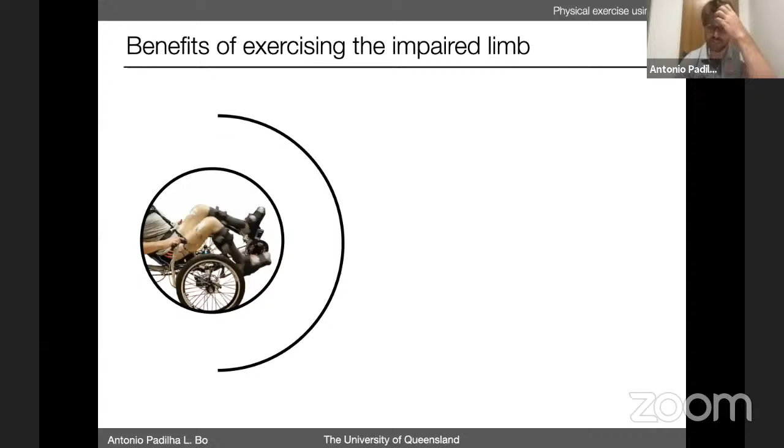So I was actually showing this video. So sorry that you're not able to see that. So that's a person with complete paraplegia cycling. And then I was talking about how actually to control that. I went through some of these benefits of the activity and then how we control that. So this is a diagram that I'll try to explain briefly. This is part of our control.

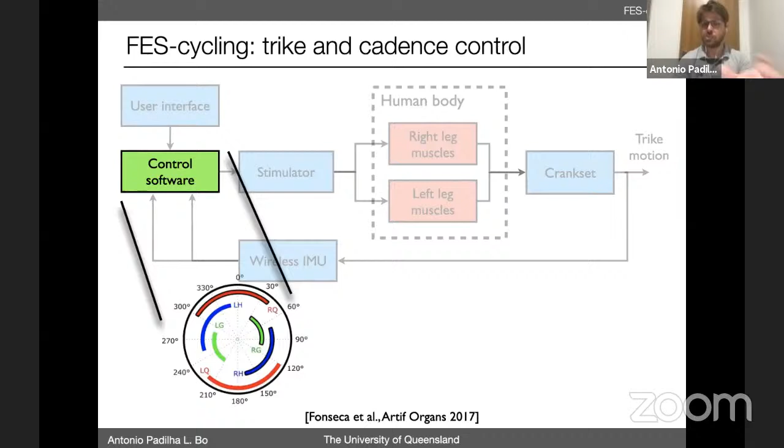And this is another level of control we can implement. So you can imagine that you have then a system that not only is a wearable active system, like a wearable exoskeleton, a wearable robotics device, but it's something that's inherently connected to your muscles and the way you move. And so this is actually controlled by the user, but then you can have different layers of control.

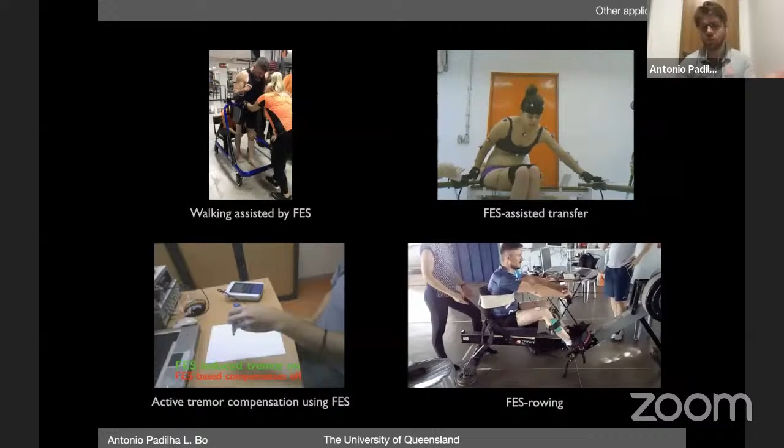So in this slide, actually, I'm showing how you could have an additional layer of control that controls the cadence or the speed of cycling. So in this case, we can have that type of performance. That was just a single example of what we can do with these technologies.

So in these videos here, sorry for that, I don't know what's happened with my slides. So in these videos here, we show other applications that can either be used to enable physical exercise by people with motor disabilities, or to be used in an assistive scenario as well. So for instance, in this video on the top right, you see again a subject with complete paraplegia that's using the same technology to actually transfer from one seat to the other, from the wheelchair to the bed, and these kinds of activities.

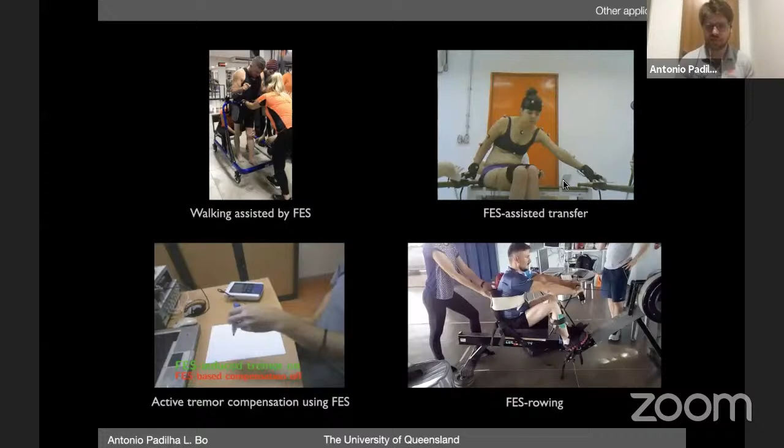Well, that's of course the core of my work. But in today's presentation, I'd like to target one specific aspect, which is: why are these systems not available to users today? Because we've been showing, not only ourselves but many other research groups, how beneficial they can be in terms of the health benefits. And so what's the problem?

And of course, I have to acknowledge that there are many issues for that. And some issues are not related to either research or technological development, but more to socioeconomic reasons and cultural reasons as well, and different aspects. Specifically for this technology, we have really hard market and regulation challenges. It's very sad that actually some clinicians, even in high-income countries, are not aware that these technologies actually exist, and so for different reasons, we see that some subjects don't have access to that.

But in addition to market and regulation, we do have lots of technical challenges that need to be tackled in order to improve the performance or the way these devices are used. There are different aspects that we could discuss, but today I'm going to focus on aspects related to how we integrate different sensing modalities, how we can integrate that with different actuation systems, so more like a wearable robotics perspective, and how we can improve the interface. So the person is controlling his body, so how can we improve that?

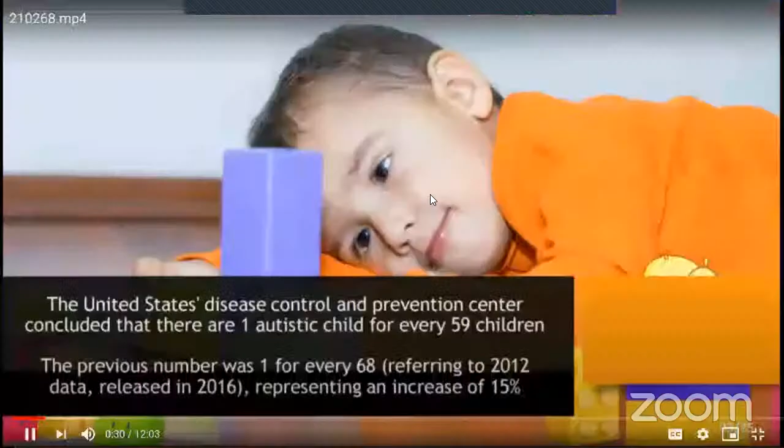Sorry, but we are not hearing now. I think the playback has stopped. Just a second. Okay. Okay.

people with an autism spectrum disorder. The Centers for Disease Control and Prevention in the United States concluded in a survey that there is one autistic child for every 59. The previous number was 1 for every 68, referring to 2012 data released in 2016, representing an increase of 15%. But what is autism?

Autism spectrum disorders, ASD, is a set of neurologic development disorders that affects

The audio is not working. Reproduce.

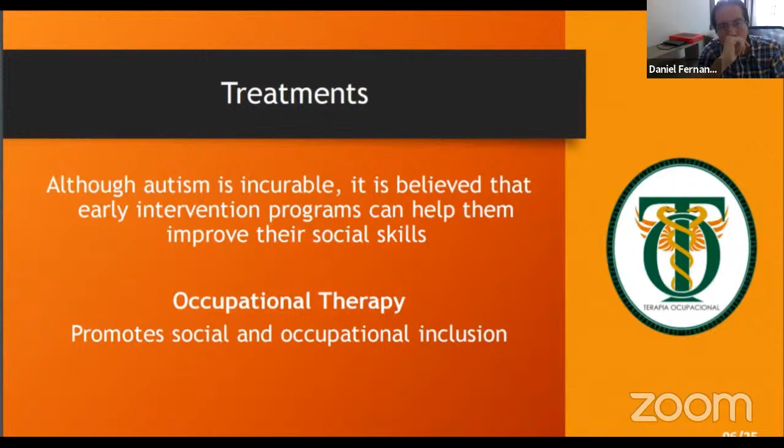Studies have shown that the interaction between children and robots has results that help children with autism and improve their quality of life. Therefore, based on our literature review, some research points have been identified and will be discussed through this presentation. We believe that this review of robotic research for children with autism provides useful information about previous work on various aspects of HRI, improving the communication with people with ASD deficiencies.

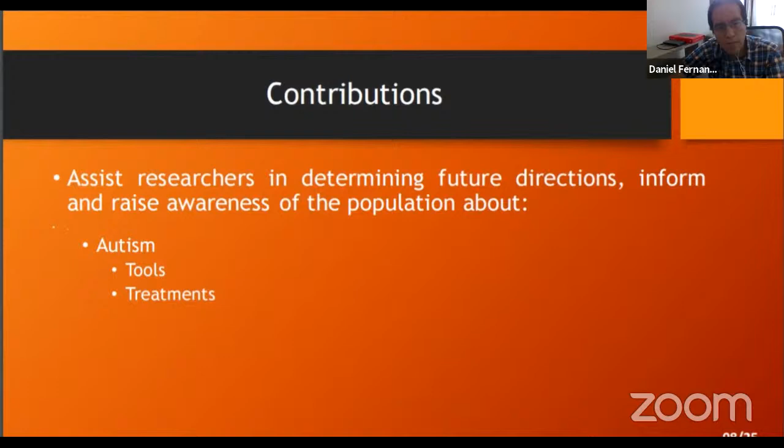Besides that, it helps future research to identify potential areas to be explored in the hope of closing existing gaps. In addition, we also hope to inform the population about existing treatments and tools. A systematic review aims to identify, analyze, and interpret all available evidence regarding a particular research question in an impartial and repeatable manner. It is possible to suggest areas that should be investigated, clarify the state of the art for positioning new research, and examine empirical results.

In this review, the main objectives were to identify works that study autism related to robotics, identify the state of the art, identify the techniques used and the existing tools, and identify and assess gaps.

For the definition of search sources, the following parameters were verified: coverage, availability, versatility, and usability. For coverage, only search sources that returned a considerable number of updated and fully accessible works were considered. For versatility, search engines were selected that support work in an automatic way. Finally, the accepted search engines were also considered using the usability criterion, that is, being easy to understand and operate.

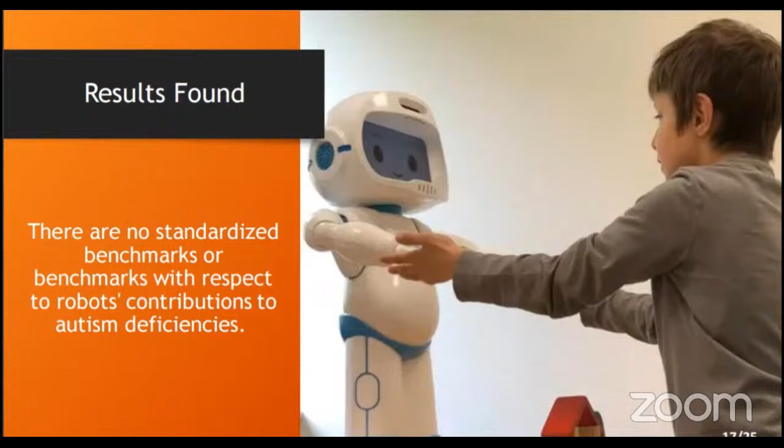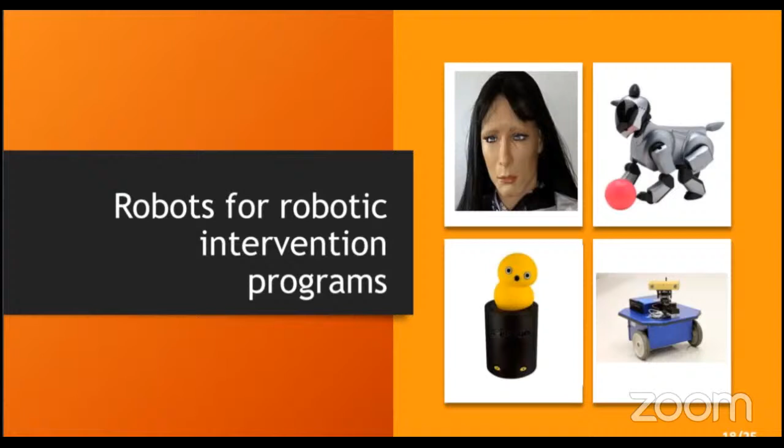In the duration of treatments, most of the research has been conducted as short-term intervention. Both short and long-term robotic intervention programs are important aspects to ensure that children obtain sufficient exposure to the robot in terms of behavior improvement.

Despite considerable efforts in the development of robotic tools for children with autism, our literature review did not find contributions to stereotyped behaviors related to autism deficiency.

Finally, conclusions: three critical research points were identified: diversity in research focus, lack of contributions to autism stereotype behavior, and the duration of experiments. Thanks.

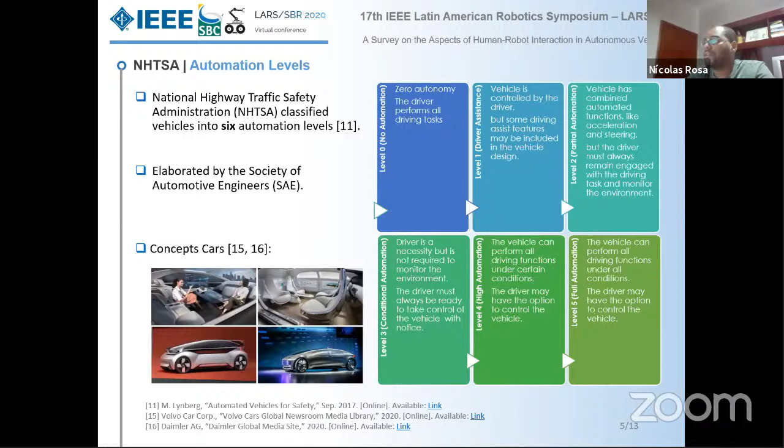In this work, we identified 4 different types of human-vehicle interactions based on 2 criteria. The first one is how the interaction is established between the agent, human and AV, and the second one is the type of technology involved in the interaction.

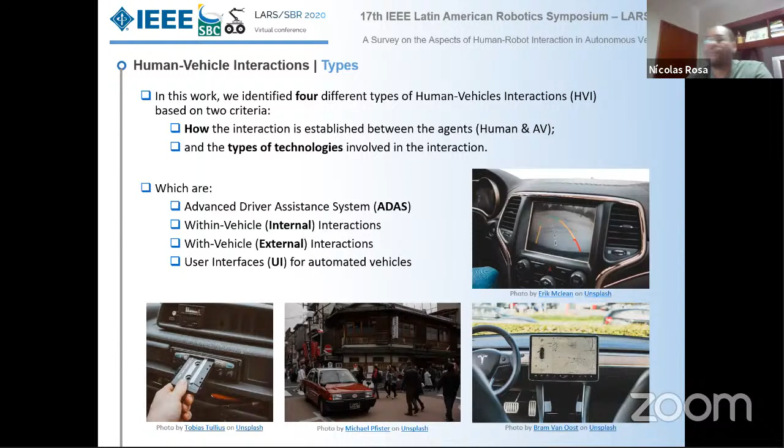They are: the first one is Advanced Driver Assistance System, ADAS. The second one, within-vehicle interaction, or internal interactions. The third, with-vehicle interactions, or external interactions. And the last one is the user interfaces, UI, for automated vehicles.

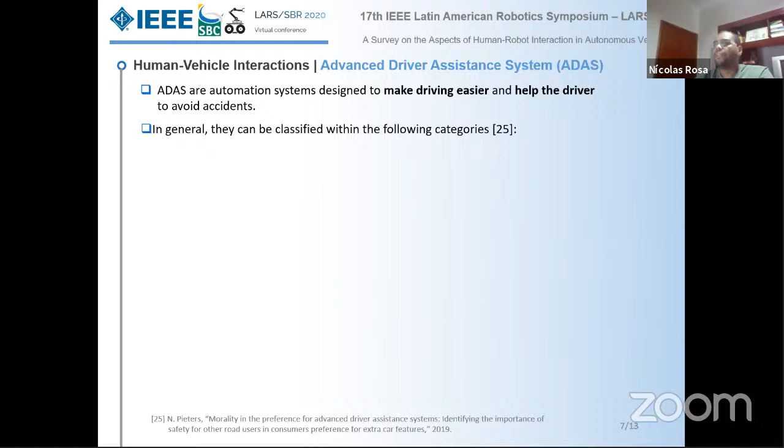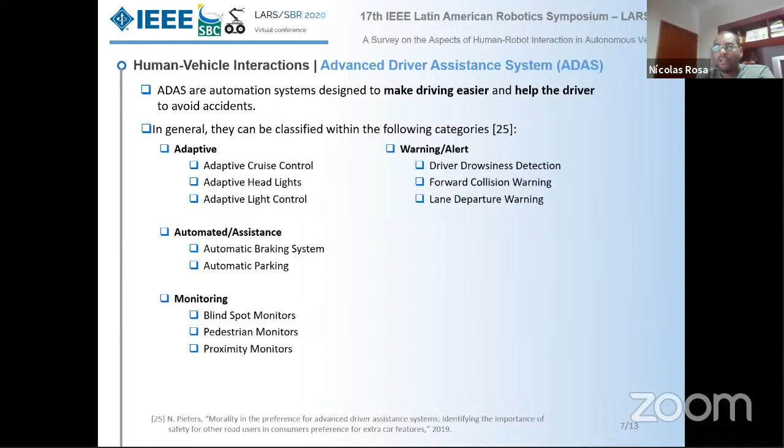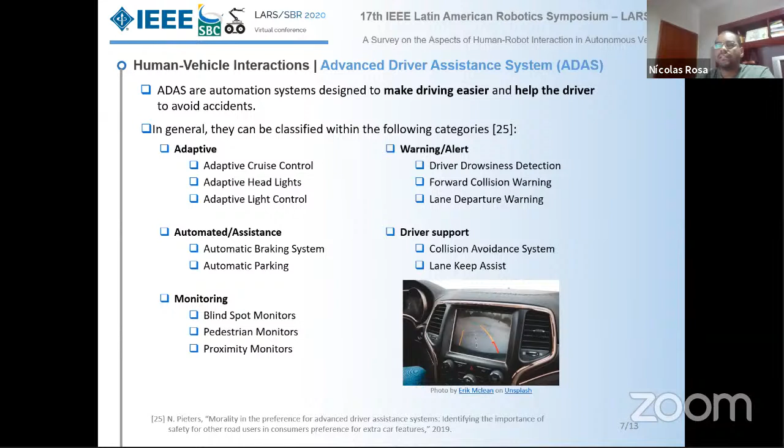ADAS are automation systems designed to help make driving easier and to help the driver avoid accidents. In general, they can be classified within the following categories: the first one is adaptive, automated, or assistance. It can be used for monitoring, warning, and driver support. The most popular ones are cruise control, ABS, and lane keep assistance, among others.

Regarding within-vehicle interactions, interactions that occur inside the vehicle, which non-driving related activities the user would like to engage in while on a ride in a highly automated vehicle. The reference research found that users like to listen to music or radio, talk to other passengers, read, work, watch out of the window, among other activities.

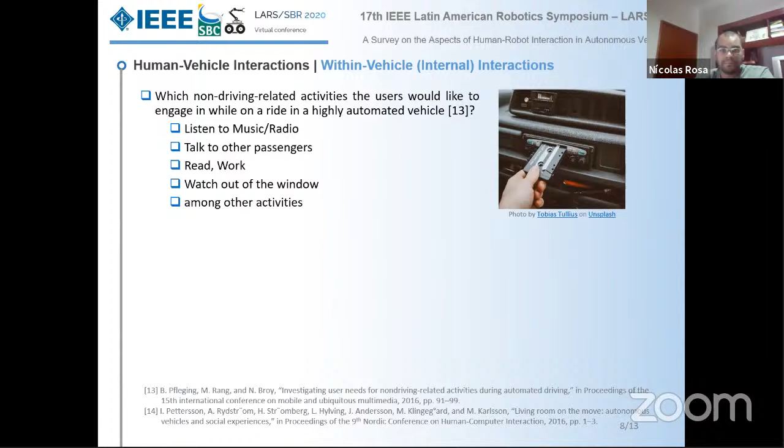This type of social experience also includes the interaction that passengers can have with other people who may or may not be present in the vehicle.

Regarding with-vehicle interactions, the inclusion of a robotic agent might culminate in a series of confusing traffic situations for other drivers and pedestrians.

Human-to-human interactions occur all the time, usually expressed as acts of kindness toward others, which makes traffic more harmonious since they indicate their movement intentions. These interactions are in general expressed by gestures, eye contact, and light signals.

However, how are these interactions handled when there is no longer a human driver? Another type of human-vehicle interaction is the user interface.

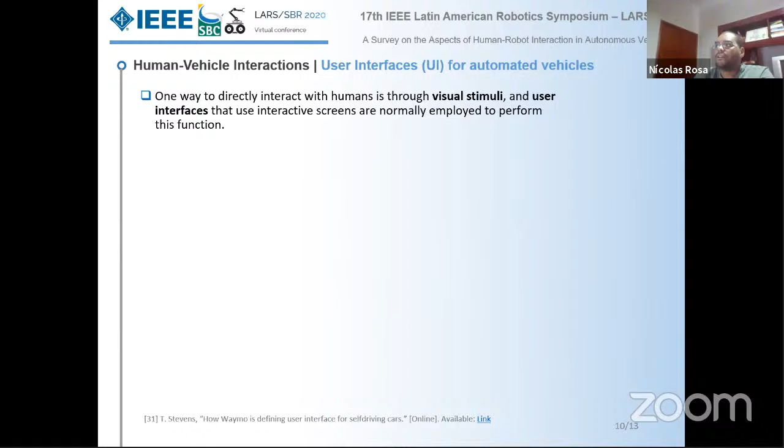One way to directly interact with humans is through visual stimuli, and user interfaces can use interactive screens normally employed to perform this function.

They can display relevant information about the trivial car status, like speed, distance traveled, and amount of fuel. Or they can display infotainment fields, allowing the driver to listen to the radio, check GPS maps, or make cell phone calls.

Research has been designed for the social experience enforcing 2 aspects. The first one is trust, and some studies have investigated aspects such as safety, confidence perception, the reasons and consequences of overtrusting, and the incorporation of human aspects to UIs - name, age, voice - that can contribute to increasing confidence.

In addition to trust, research has been concerned with interaction design for recreation purposes, entertainment. In a highly automated vehicle, a direct impact for some drivers will be the loss of driving pleasure. This is a transition process from joy of driving to joy while driving.

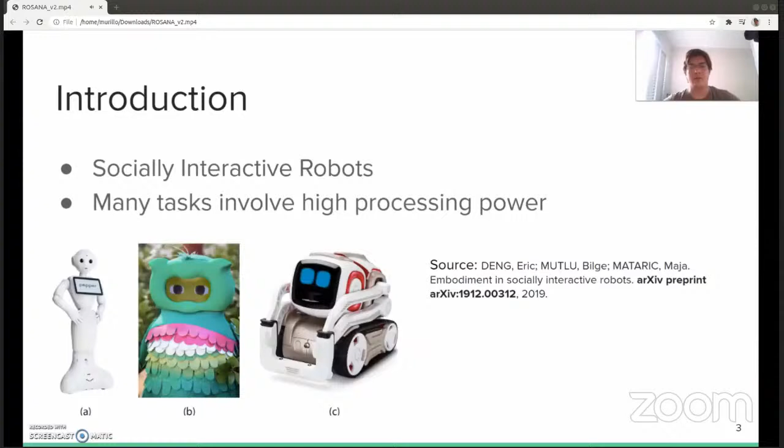When I talk about socially interactive robots, we're talking about robots which are able to communicate with people and to follow social norms. Following those norms, however, involves some tasks that require high processing power, such as recognizing people and objects. These are some examples of socially interactive robots. Here we can see Pepper, Kiwi, and Cozmo.

And here we're presenting ROSANA, robot for social interaction in unstructured dynamic environments. Some of ROSANA's characteristics are perception given by a cloud system, verbal and non-verbal communication independent of the agent, and an integrated proof of concept.

Here is a general overview of ROSANA's mechanics. We have a Pioneer 3DX, which serves as a mobile base and has sonar range finders, a Hokuyo laser rangefinder, a CPU which communicates with all the system and is ROSANA's brain,

a Microsoft Kinect One, which is used to recognize people and objects, an emergency button which is needed in cases of robot applied in real life, because we don't know what kind of emergency can happen that involves stopping the robot, and a virtual agent named ANA.

Although the Pioneer 3DX already had sonars, it's important to use a Hokuyo laser rangefinder because it has greater range and precision. However, we are not totally disregarding the Pioneer sonars because there are some glass doors in the environment we are going to test. So having a sonar is pretty valuable for this specific case.

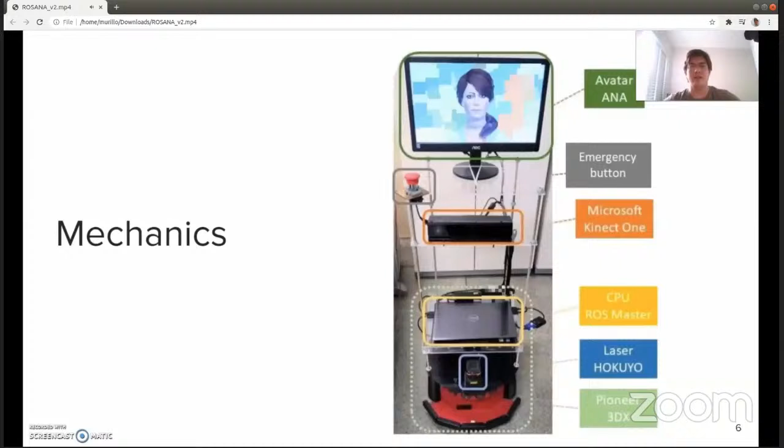One key characteristic of ROSANA is using cloud robotics. We are considering here cloud robotics as any automation system that relies on data or code from a network used for robots. And so we have here perception as a service. We're calling this term in the same vein of robots as a service, because we're talking about having perception processing done on a cloud. Specifically, doing real-time RGB, RGBD recognition and boosting learning.

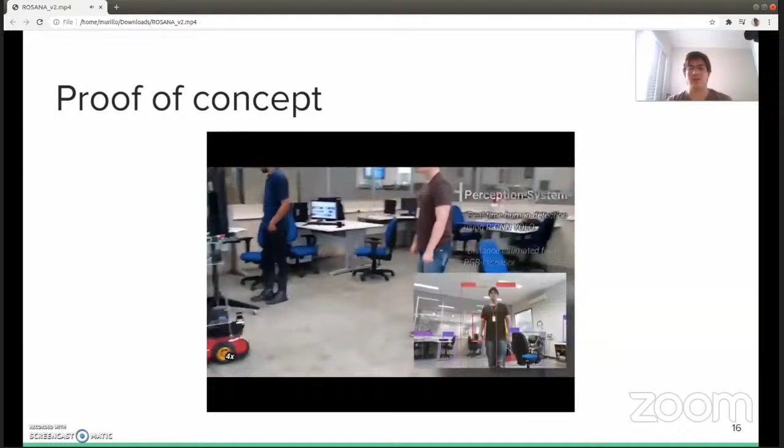ROSANA sends data of this person to the cloud. The cloud runs YOLO and recognizes the person. Being an RGB-D camera, it's possible to recognize the person's distance using both the Kinect and the laser rangefinder. As you can see, the robot goes to the person, recognizing it. It is also recognizing many screens in the room too. If the person gets too close, the robot backs away.

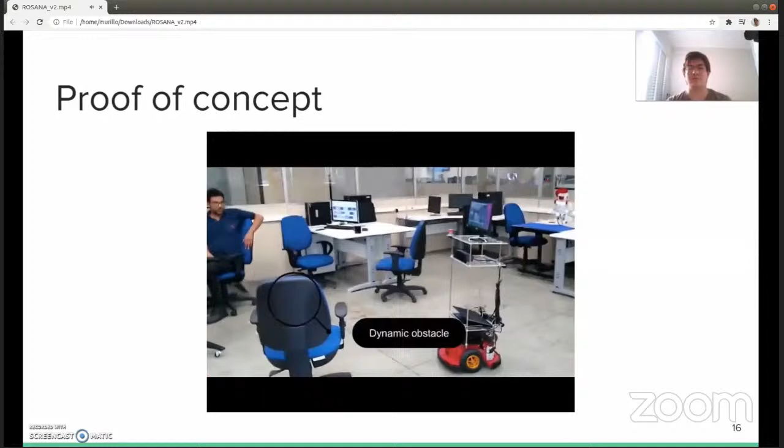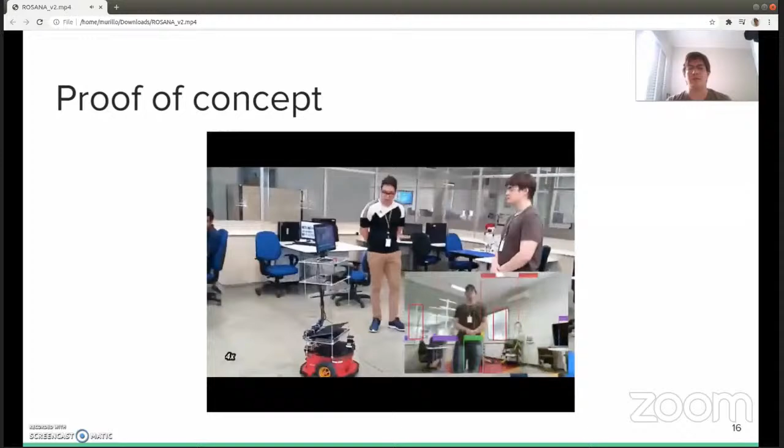In the second experiment, we have put a chair as a surprise obstacle for the robot, hereafter known as dynamic obstacle. So ROSANA is able to avoid the dynamic obstacle and get to the person. In the third experiment, we look at what happens if ROSANA starts following a person and then another person enters. So ROSANA will start to follow the other person.

As a conclusion, we are making here an overview of ROSANA's actual state. It is still under development. We plan to do more work in integrating ROSANA with the ANA virtual receptionist. And there is also some ongoing work with the cloud architecture in order to make processing faster. As a social robot, it's important to have real-time processing.

Not that it's not happening in those videos, but these are cases where there was a single person or at most two people. We also want to process those people's skeletons and in the future recognize their emotions. So there are many things which will be needed to be processed in the cloud.

Thank you for watching this presentation. Feel free to ask any kind of questions you wish. Thank you. Josué, is our sound okay? I believe not. Okay, please, do we have any questions? Someone from YouTube, Bruno.

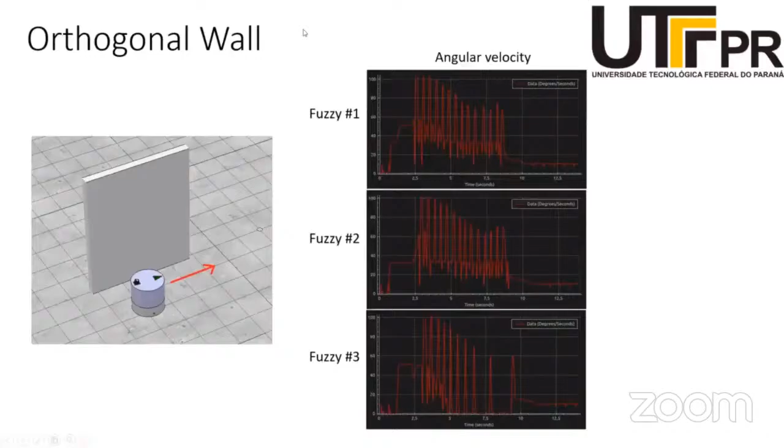The second experiment involved a simulation of a social event with several static and dynamic obstacles, where the robot must deliver to 5 tables while avoiding collisions. 5 different combinations of table deliveries were carried out, and these were executed by the 3 fuzzy implementations, where the execution time and the total distance traveled were measured. During the simulation, there are interactions with people walking and objects on the scenario. The execution of different combinations aims to obtain an average behavior of the controllers. The videos of the simulation, as well as the source codes, are available on the WaiterBot GitHub repository.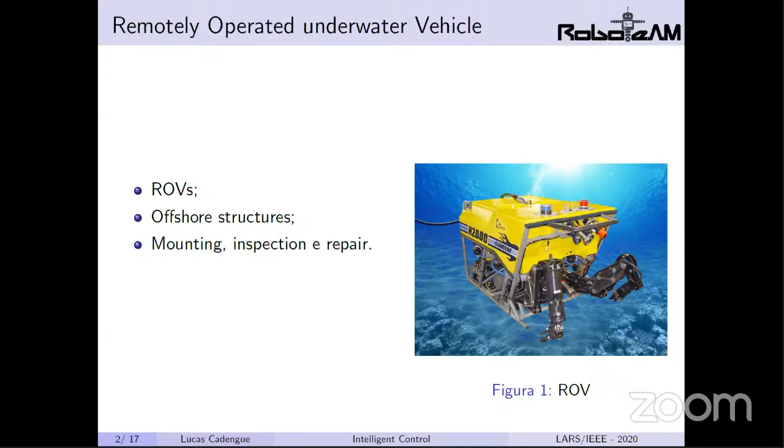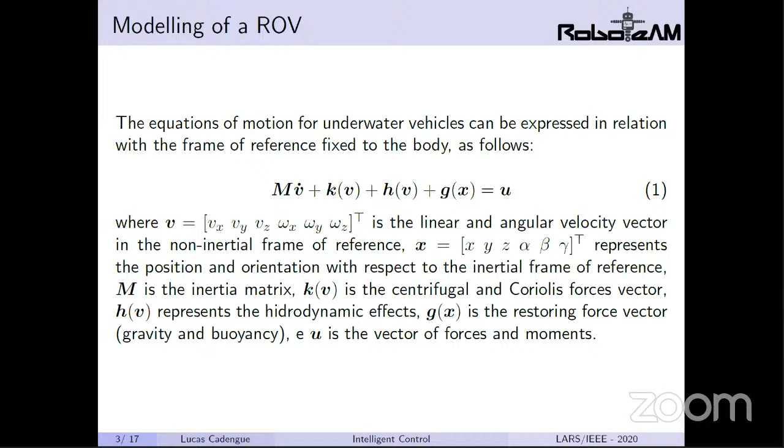The equations of motion for this robot can be expressed in relation to a frame of reference fixed to the body with equation 1, where the vector v is the linear and angular velocity vectors, and the vector x represents the position and orientation with respect to the inertial frame of reference. M is the inertia matrix. K is the centrifugal and Coriolis forces vector. H represents the hydrodynamic effects, and vector G, the restoring force vectors, such as gravity and buoyancy. And the vector U is the vector of forces and moments.

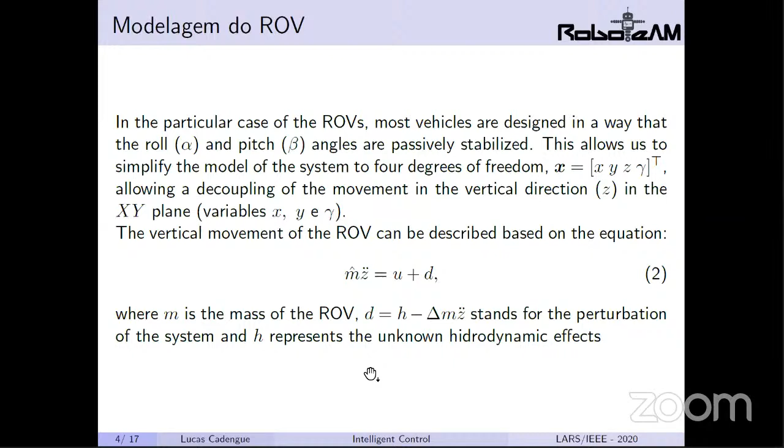So in the case of the ROVs, it is possible to decouple the movement in the vertical direction so that the vertical movement of the ROV can be described with this simpler equation 2, where M is the mass of the ROV, D stands for the perturbation of the system, and H is the unknown hydrodynamic effects.

Due to the necessity of controlling the ROV remotely, the control system is one of its most important elements. There are several strategies for controlling it, such as the traditional PID and some nonlinear techniques like sliding mode control and feedback linearization. The latter is the one that was used in this work.

So feedback linearization, simply put, is a technique that transforms a nonlinear system into an equivalent linear system by using feedback. So the system in a closed loop is linear, but not the original system. So we work with the equivalent linear system, and with that we can use the techniques of linear control.

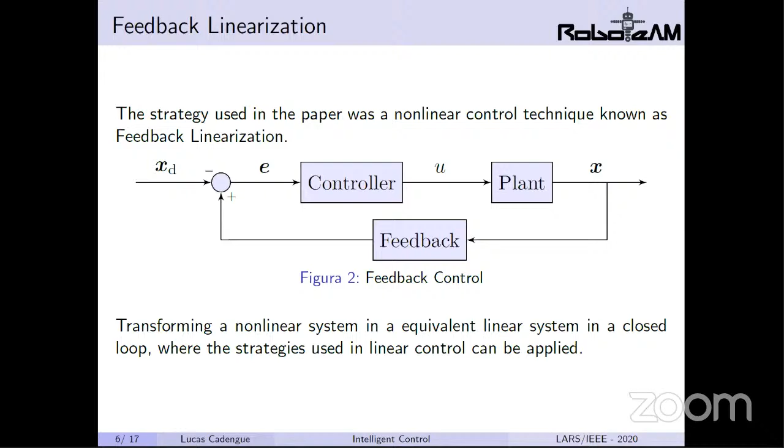Because of that, it is widely used in structured environments, such as industrial robotics, for instance. But this is not our case for the underwater robot, because there are some unmodeled dynamics, and there are also maritime currents or animals that can bump into the robot. So we have to use something else to improve the controller's performance.

The strategy that we used in our work was to incorporate a neural network in order to predict the unmodeled dynamics and the uncertainties in the modeling.

So why neural networks? Because it is a widely used technique, and it's bio-inspired and allows a non-linear approximation. Besides that, there are some works that show artificial neural networks can approximate the uncertainties of a model.

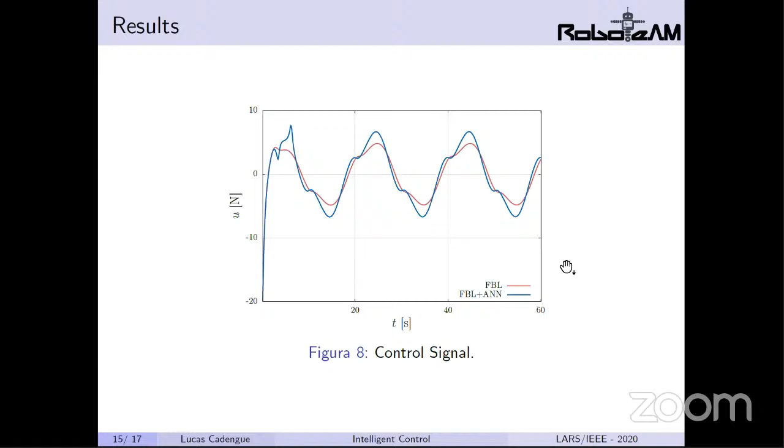So by concluding, in this work, feedback linearization was combined with artificial neural networks optimized using a reinforcement learning algorithm, UCB, in order to deal with the tracking problem of our ROV. Using numerical simulations, it was possible to observe the performance improvement in the proposed framework compared with the traditional feedback linearization controller, and also the utilization of the UCB algorithm for optimizing the centers had great performance.

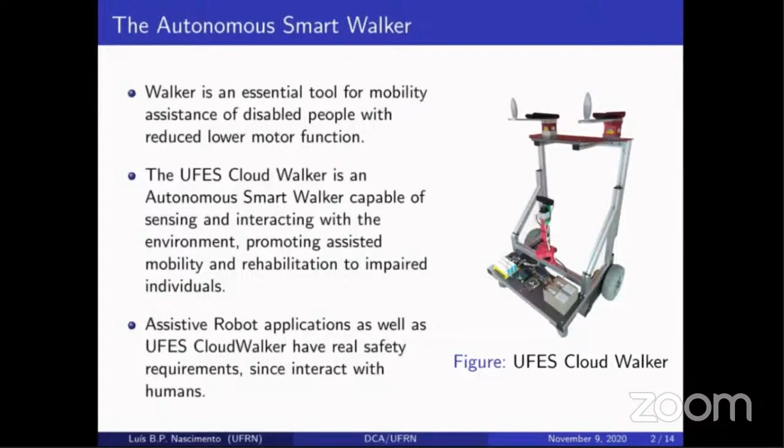And that's why we are working with the probabilistic foam method, or PFM, a sampling-based path planning algorithm with the main advantage of obtaining a path bounded by a sequence of bubbles, which guarantees a free obstacle region for safe maneuvers. This method has only two parameters. The first one is R-min, that denotes the minimum radius allowed for a bubble, and K is the maximum number of children bubbles that a bubble with radius R-min can have. The probabilistic foam propagates through the free space by expanding new bubbles on the surface of the parent bubbles.

For each generation, new bubbles can be expanded on the surface of other bubbles as a BFS algorithm. Thus, the foam propagates until some bubble encircles the goal configuration. An obstacle-free path can be extracted from the foam by finding a sequence of overlapping bubbles from the goal configuration to the initial configuration. And this structure is called rosary.

The rosary is an important structure since it maintains the path with high clearance from the obstacles. Besides, it's possible to apply some path smoothing techniques, maintaining the path within the bubbles, which guarantees the path safety.

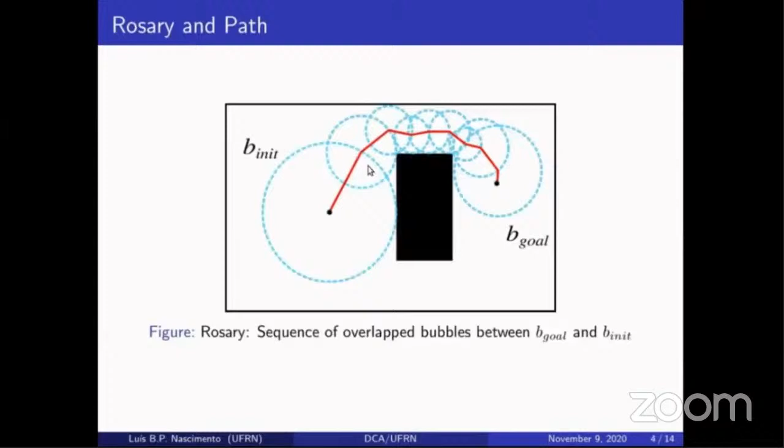The goal-based probabilistic foam is an algorithm based on PFM, which improves the searching time by computing fewer bubbles. It is inspired by the RRT goal-based algorithm and also has two parameters, the R-min and the value of the bias.

For each iteration, a random auxiliary configuration QAux is sampled to find the new parent bubble. The method GBPF performs an exhaustive search looking for the nearest bubble from the auxiliary configuration. On the surface of this bubble, a new child bubble can be expanded, and the center of this bubble will be the nearest configuration between the auxiliary configuration and the surface of the parent bubble. Finally, the configuration QAux has a chance to be sampled on the goal configuration, and all steps are repeated normally.

In this paper, we proposed a variant of the GBPF, the improved goal-based probabilistic foam, the IGBPF. This method presents another way to choose the parent bubble, and it has the same two parameters. As well as GBPF, for each iteration, a random configuration QAux is sampled on the free space.

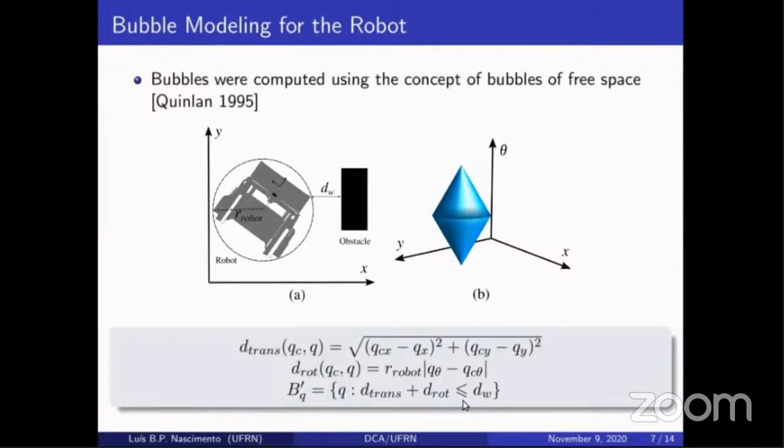The smart walker is a robot with rotation. So if the walker moves from the origin point QC and travels to an arbitrary point Q, and if the translational distance plus the rotational distance traveled by the robot was less than or equal to dW, the robot will not collide with the obstacle. Finally, this region with a conic shape is defined as every configuration Q such that the sum of the translational and rotational distance from QC to Q is less than or equal to dW.

To make possible the use of this conic region for those methods based on probabilistic foam, first we need to calculate the distance between the center of this region and its bounds. This distance, denoted by RB, will be the radius of a new spherical bubble inscribed in this region.

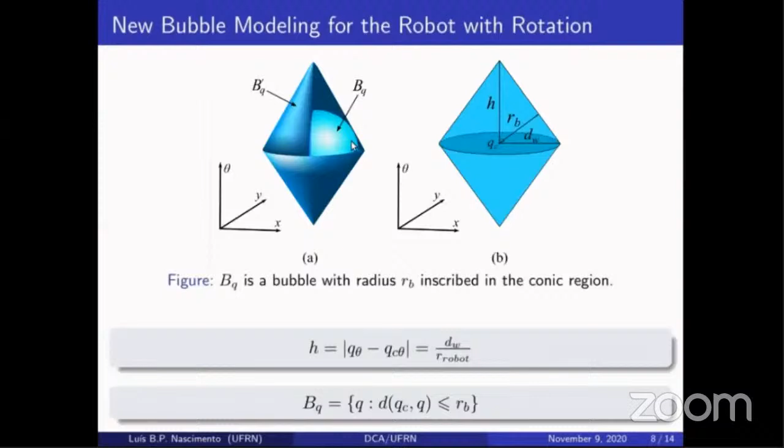Now, in order to simulate the path planning for the smart walker, we defined two maps. The first map presents only one possible route from initial to goal configuration, and it has a narrow passage. And for the second map, we have two possible passages. The first one is narrow, which has a short length, and the second one is larger and longer. And in this table, we have here the parameter values for the algorithm.

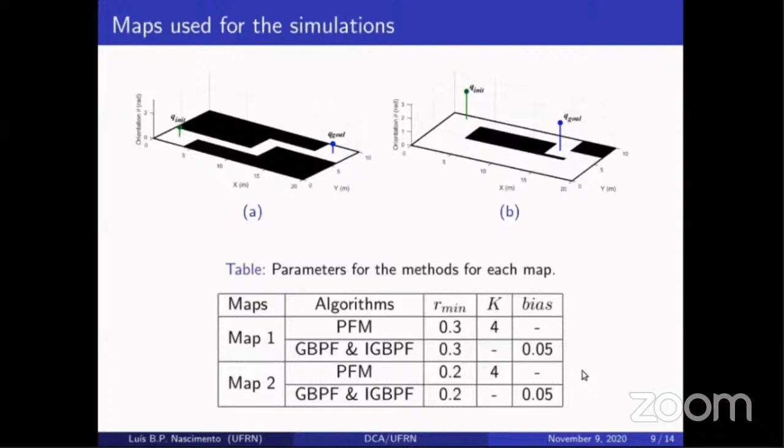This figure shows the results for one simulation. We have the rosary found for each method in each map, and inside the rosary we can extract the path. For the first map, the rosaries look similar for all methods because there is only one narrow passage. So let's look at the second map.

It is possible to observe that the methods present different rosaries in different directions. For PFM in figure D, the foam propagated through the larger space, which is safer. However, the path is longer. On the other hand, GBPF and IGBPF converged through the short passage, obtaining short paths.

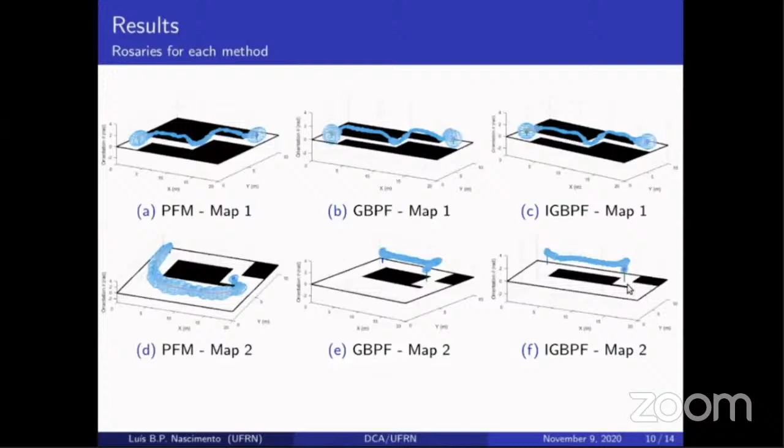is higher. Another feature is that these bubbles can be expanded for all possible passages, and large passages generate larger bubbles. So this increases the probability for the foam to converge faster through this space. And for this case, it will generate longer paths. In the process for IGBPF and GBPF, the bubbles are guided by random configurations, but the goal makes the probabilistic foam converge faster to the goal configuration.